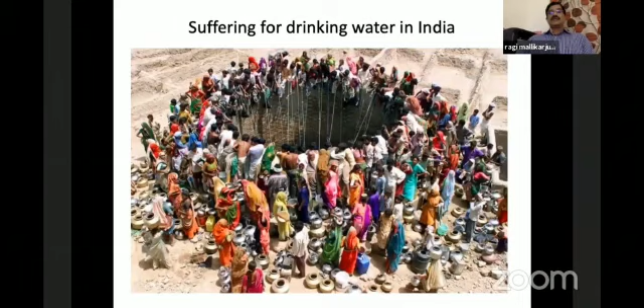This is the demand of water. We all know water is very essential now, and is in shortage - in some places we have droughts, and in some places we have floods. But if you see the groundwater, it is declining day by day in India, and the need of the hour is only to save every drop of water that falls through rain.

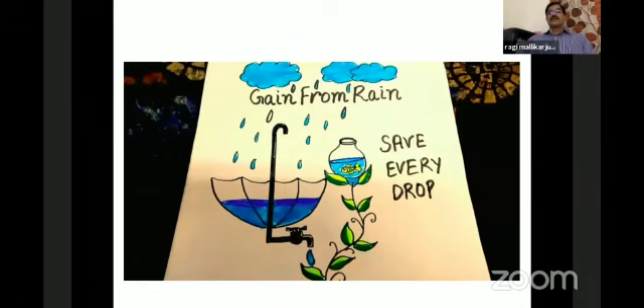That is, gain from rain is the slogan now. We are waiting for the tap to come, but we are wasting the rainwater. This picture shows exactly what is needed now. Every drop counts, and we should try to save every drop of water, whether it comes through the tap or through rain. We should harvest it.

We all know that fresh water on the earth is only 2.5%, and within that 2.5%, groundwater is 30.1%, on which most of us are dependent. Glaciers and ice caps are almost 68.7%, and other surface waters are only 1.2%.

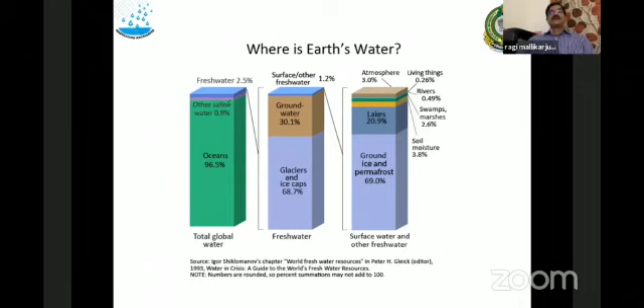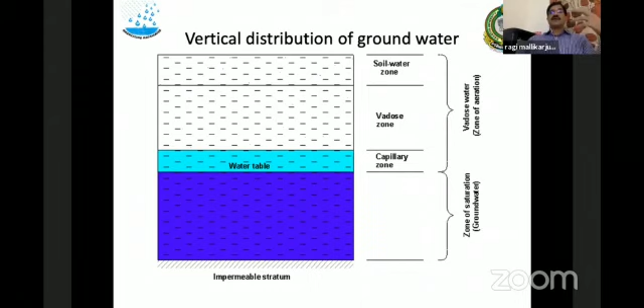So with these statistics, this is the water table where we all should concentrate now. We are living on top, and we should recharge the water table. Without recharging the water table, if you just sink bores, the water will not come out in future. So we are just taking out water from the water table and not putting water back inside. This is the sad story.

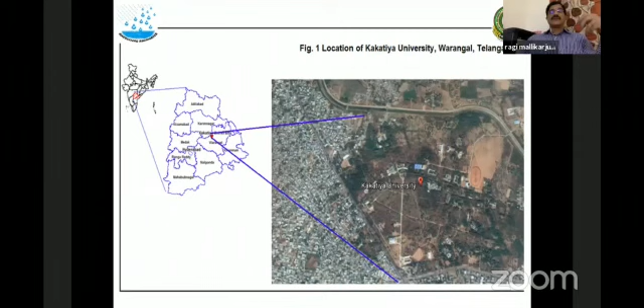This is the location of Kakatiya University, a 650-acre campus situated in Warangal, Telangana state. This university was facing a lot of water scarcity because we have about 8,000 students on campus, whom we should cater to - the hostels, departments, and many other offices. So there used to be a shortage of water every summer, and we were facing a lot of scarcity.

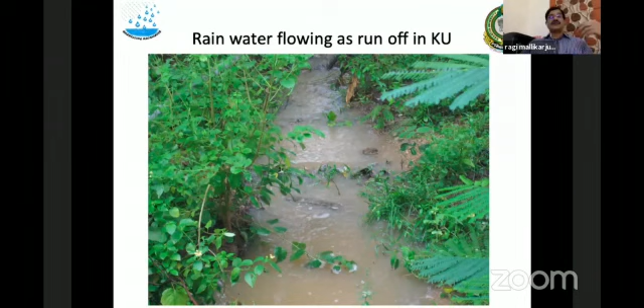Whenever the rain comes, the water runs off from the Kakatiya University campus. This picture shows that the rainwater is running out of the campus untapped. We saw this for a long time, and we thought about what we could do so that we could stop the rainwater within the campus.

With that idea, the main statistics go like this: we need 4.15 lakh liters per day of water for our university needs. But through all the sources we collect from different bore wells, we are getting only 3 lakh liters per day, and there is a shortage of 1 lakh liter per day.

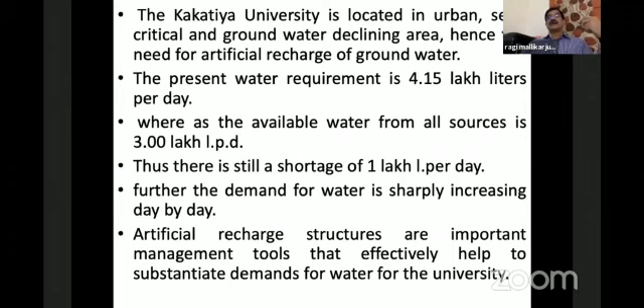To meet this gap, we planned this rainwater harvesting structure project on the campus. We receive almost 980 mm of average rain within 57 rainy days, which generates about 254 hectometers of runoff on our campus. We thought of tapping at least half of it, 125 hectometers, so that we could leave the other 125 hectometers to the lower riparian.

That was our proposal, and we started planning and preparing a project proposal to tap 62 hectometers of rainwater, through which we can recharge about 12 hectometers - about 20% of the rain which falls on our campus. So we were planning to use this 20% of the rainwater to recharge the groundwater.

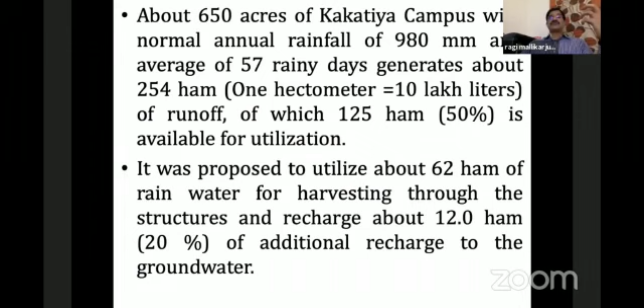There was no other alternative for us, because we were facing a lot of shortage of groundwater on campus, and we used to declare a vacation for students in the month of April so that they could go back home due to the water shortage, and they used to come back in June to continue the academic year. So there was a big problem for us.

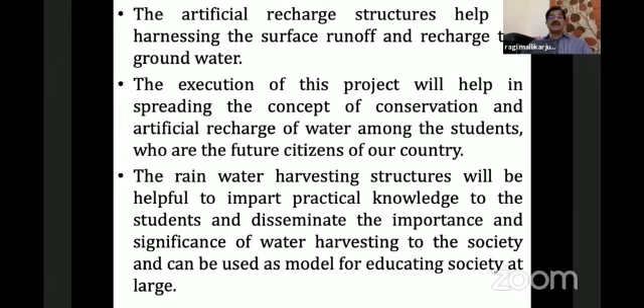Because of that, we planned this project, and its execution will definitely help students understand the concept of water conservation and artificial recharge of water. They are also future citizens of the country, and they can pass on the same knowledge in society, so society can also learn a lot from this project.

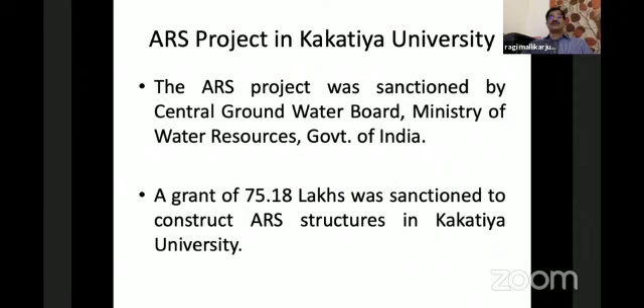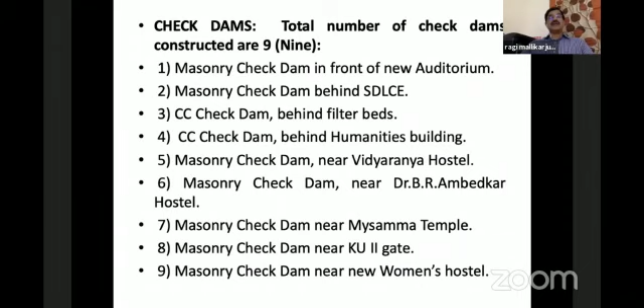With this concept in mind, we applied for an artificial recharge structure project to the Central Groundwater Board, Ministry of Water Resources, with a grant of 75.18 lakhs, which was sanctioned to Kakatiya University. With that grant, we constructed structures like check dams - about 9 check dams on the campus, 2 percolation tanks, and 2 mini percolation tanks.

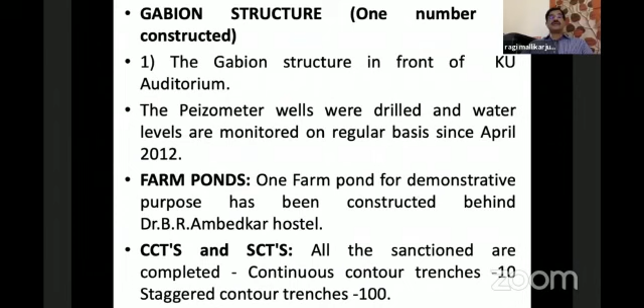We have constructed gabion structures, farm ponds, continuous contour trenches and staggered contour trenches. We have also constructed 69 rooftop rainwater harvesting structures for all the buildings spread over the campus, each with huge dimensions of 6 meters by 1.5 meter width and 2 meters depth.

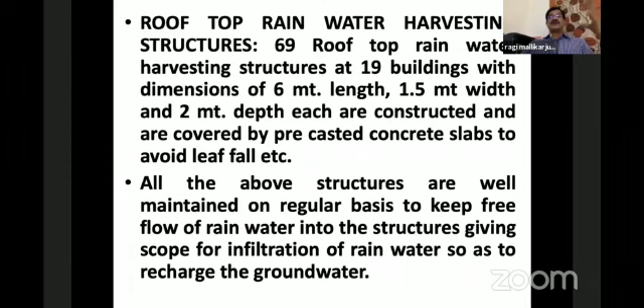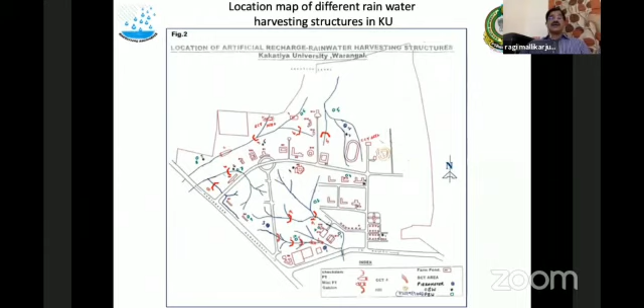I myself and Professor Nijan Kumar, late Professor Nijan Kumar, we both came together and did this project along with Desai. Dr. Desai is a consultant for us.

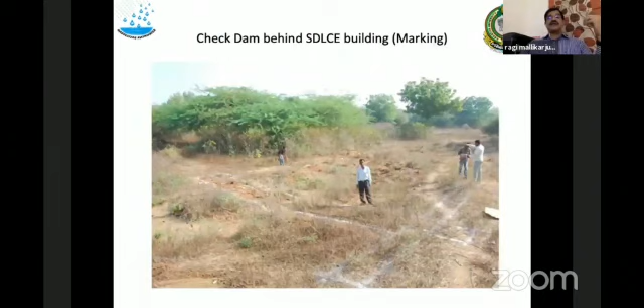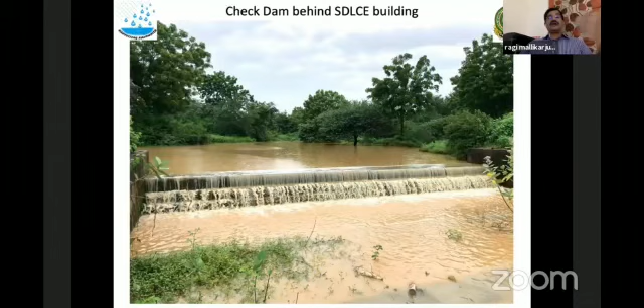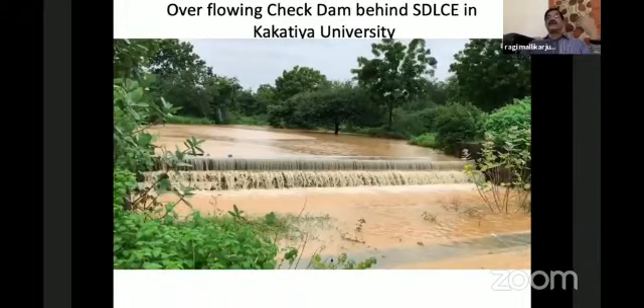This is the check dam after construction. You can see how the water is flowing on the campus. Really, this is a feast to the eyes to observe during the rainy season. This has become a picnic spot also now.

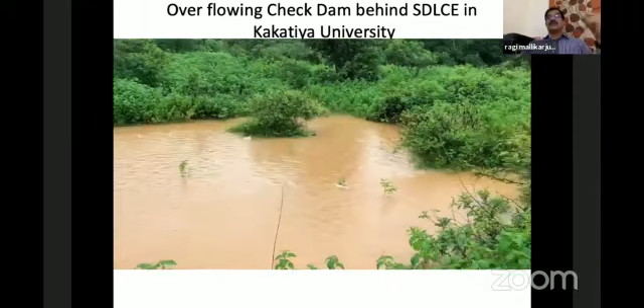This rainwater harvesting structure, the check dam, will get filled up in the rainy season at least 15 times, and in those 15 cycles the water gets stagnated and infiltrates into the ground, recharging the groundwater. So this is one of the excellent structures we have on the campus.

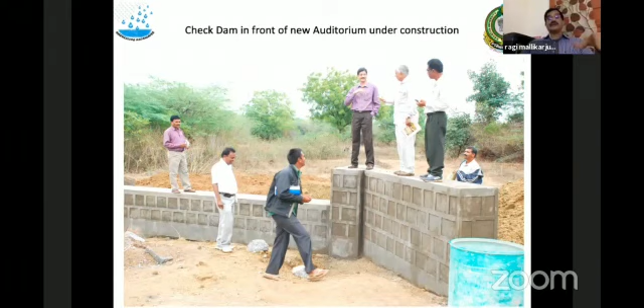Such structures we have 13 on the campus: 9 check dams and 4 percolation tanks.

This is a check dam in front of the auditorium. You can see this is the new auditorium which we have constructed. In front of that we have this check dam, and now you can see it is overflowing.

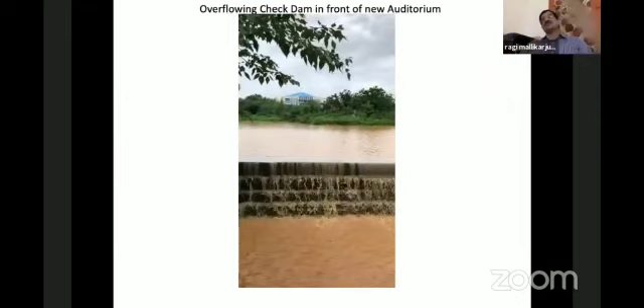We have a chain of check dams. This is the first check dam, this water goes to the second, second to third, third to fourth, and fourth to fifth, like that. One side we have 5 check dams, other side we have 5 check dams. The water is stopped within the campus only and is made to infiltrate into the ground.

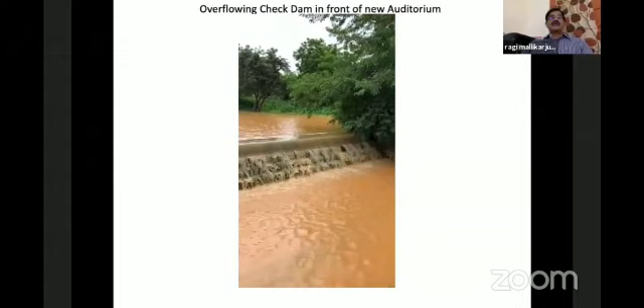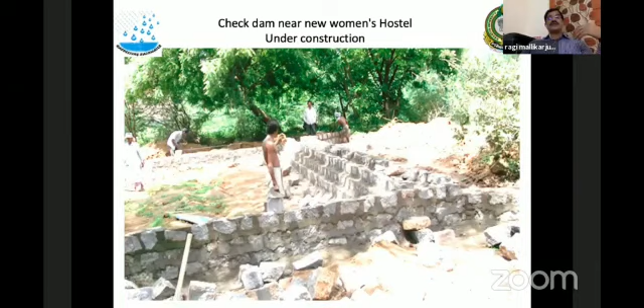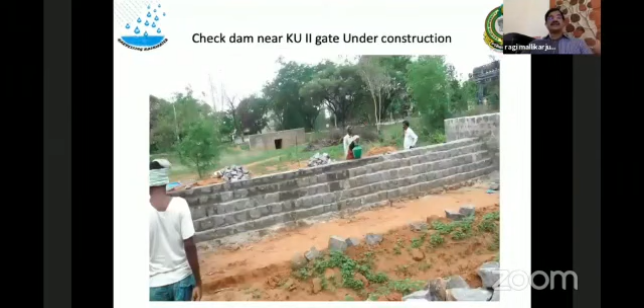This is also a check dam, and this is after construction. You can see the building here and a check dam here. So you see after construction how it looks - this is how the greenery has grown, and the groundwater is also recharged a lot.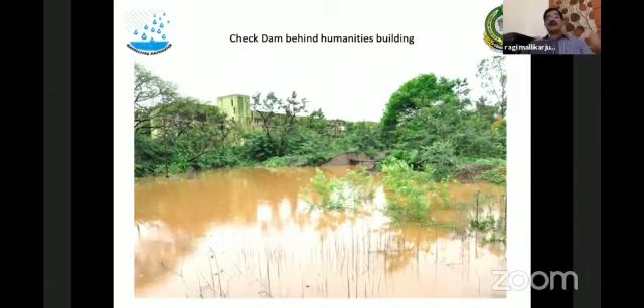So this is another check dam, and this is after construction. This is during construction of another check dam, and this is after construction. Like that, this is a percolation tank, which is an excellent, huge one.

So you can see the location of the check dam, location of the percolation tank before construction. This was during construction only, and this is after construction. You can see the view, it has completely changed.

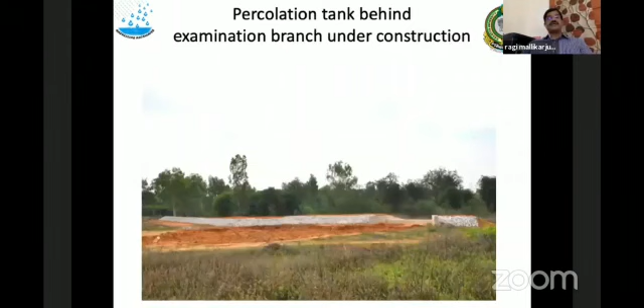Like this, we have constructed the check dams and a lot of harvesting structures on the campus. These are all different photographs of check dams. You can see the 2 ducks also swimming in this check dam, so flora and fauna has also developed a lot.

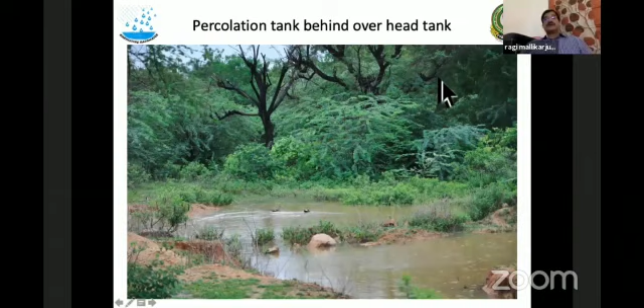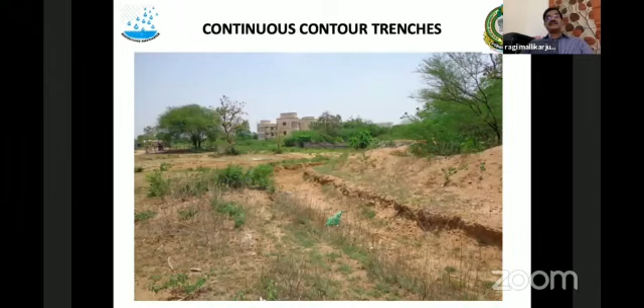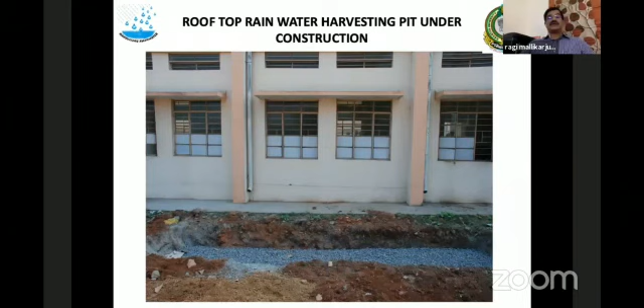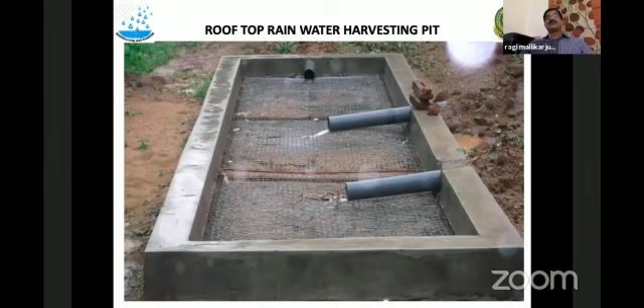This is the photograph of the rooftop rainwater harvesting pit during construction, where we filled up the material with the required material. This is a little after construction, but because of the thick vegetation on the campus, we faced a lot of problems - a lot of litter falls on this and clogs the water infiltration. This is the litter which we have seen.

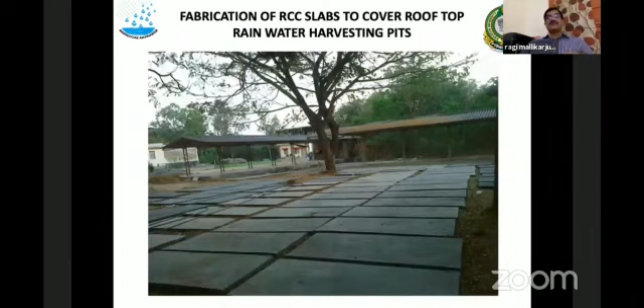To avoid this, we completely covered it with reinforced concrete slabs like this. Now it is safe - all the 69 structures are completely covered like this with the reinforced concrete.

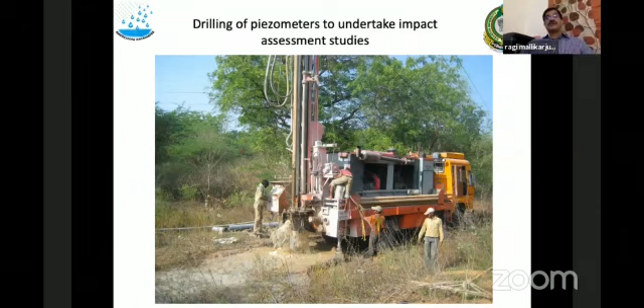We have also drilled some piezometer wells on the campus to observe the water level and also to see the quality of the water. This is one of the borewells which I want to stress upon - this is a completely dry borewell which we drilled just to observe and study the water depth.

This borewell was not even yielding one single drop of water before this project. After the project, the borewell now has water at a depth of just 10 feet. You can imagine the impact of the rainwater harvesting structures on the campus.

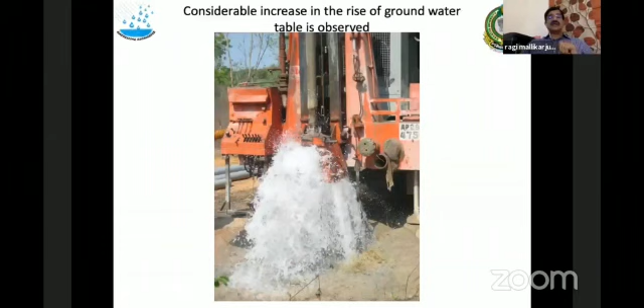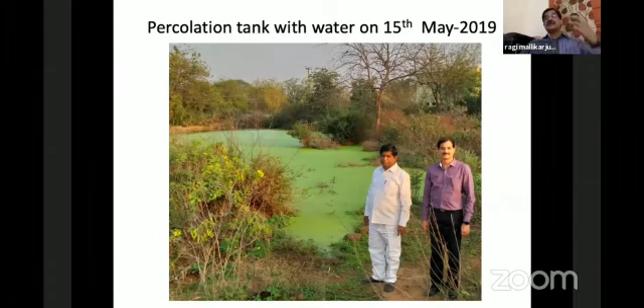Sri Prakash Rao sir has also visited our site. This is the site of a percolation tank on 15th May 2019. During hot summer, the water is still there in the percolation tank.

Dr. Rajendra Singh ji was here with us to deliver a lecture on water literacy, river rights and responsibilities recently in February. This was hugely attended by all our students and others.

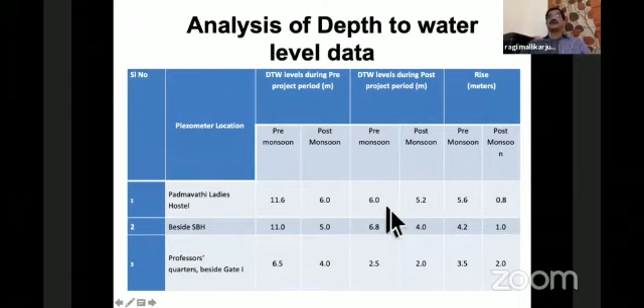This is a table which shows the rise in the levels. You can see post-monsoon and pre-monsoon levels during pre-project and post-project. There is an increase of almost 5.6 meters to 4.2, 3.5 meters like that. This was a tremendous increase in the water level after construction of the rainwater harvesting structures.

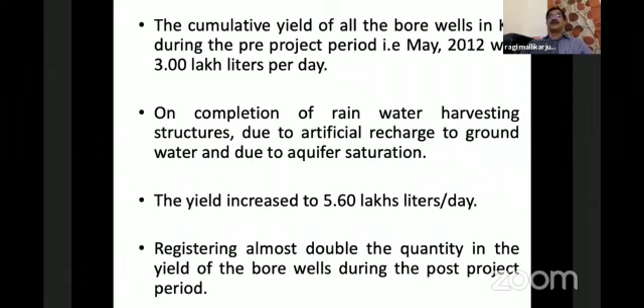Please try to conclude in 2 minutes. Yes, after the construction, post-project, earlier we used to get 3 lakh liters per day yield. Now we are getting 5.6 lakh liters of yield every day. This is a marvelous picture for us, and a marvelous result also.

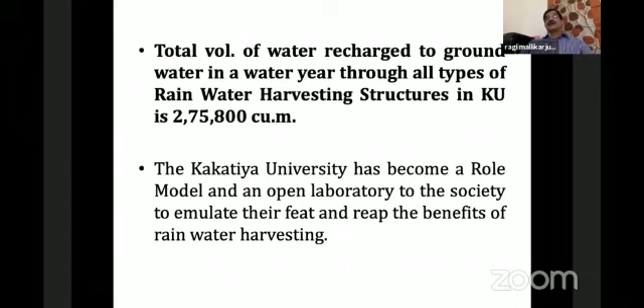The total volume of water recharged to groundwater in a water year through all types of rainwater structures we have constructed is around 2,75,800 cubic meters. With this we applied for the National Water Awards, and the Government of India was kind enough to award us the All India First Prize under Best Institution for Successful Campus Water Usage in New Delhi on 25th February 2019.

Sri Arjun Ram Meghwal, Honorable Minister of State for Water Resources, presented us the award of 2 lakh rupees check with the trophy and a citation.

This has increased our burden on our shoulders a lot, and we are still thriving to do something for the society. This is practice before preach. In my farmland, my father got inspired by seeing my work on our university campus, and he has constructed a big farm pond of 3 acres area.

Everybody should feel the responsibility, as done by our Kakatiya kings 800 years back. There was no need of so much water, but they built with foresight the water harvesting structures, and now that is a gift for the farmers of this region.

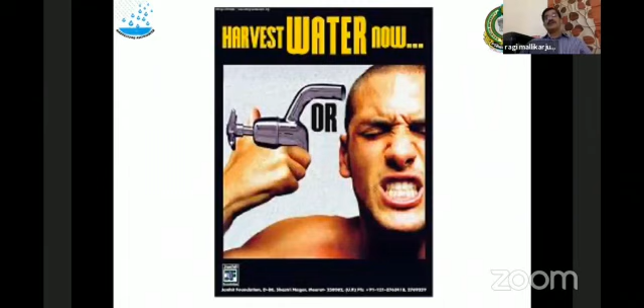I once again stress upon all responsible persons and citizens to save water and also harvest the rainwater, so that we can give fresh water to the future generations to come onto the earth. Harvest now, or it will be very suicidal to humankind on the globe. Rain is free, let us harvest it.